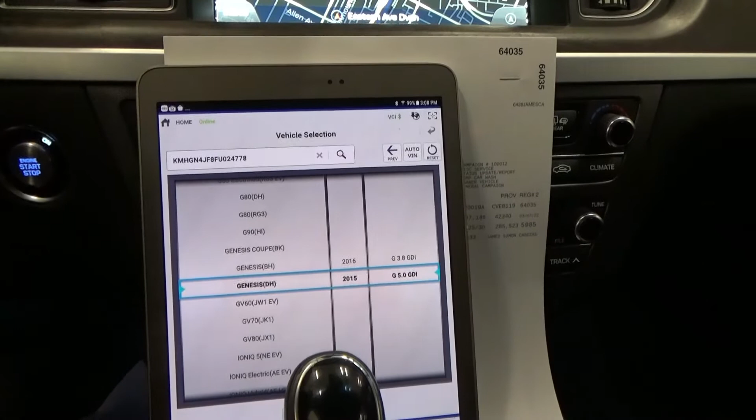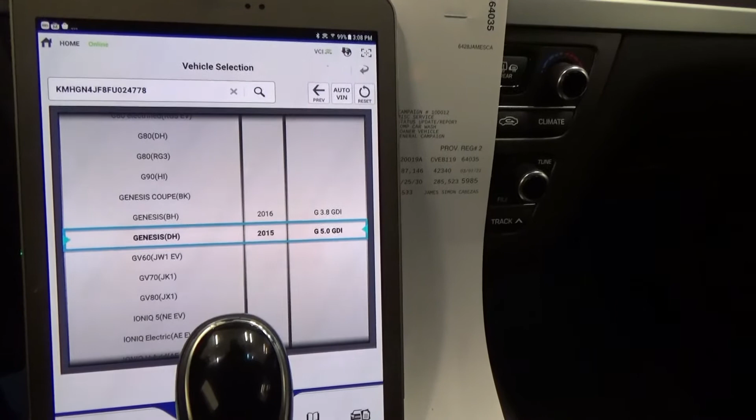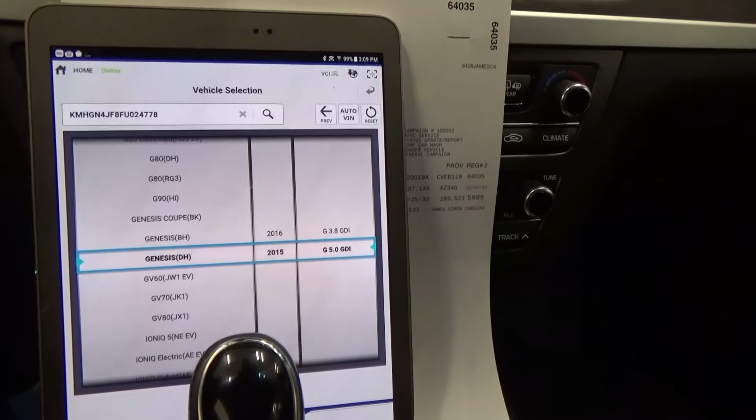So today we got a Genesis, I think it's a 2015 5.0 liter. Customer complained that every time he opens the door, it's not all the time, the trunk opens by itself. I duplicated the problem. I open, it doesn't matter which door, even the driver front, passenger front, rear doors, all of a sudden the trunk will open by itself.

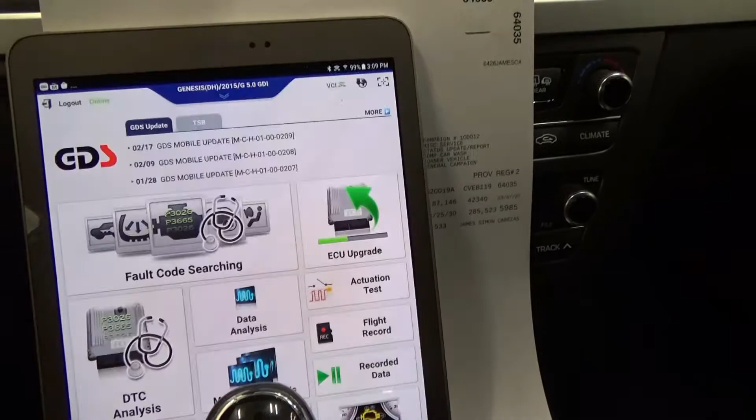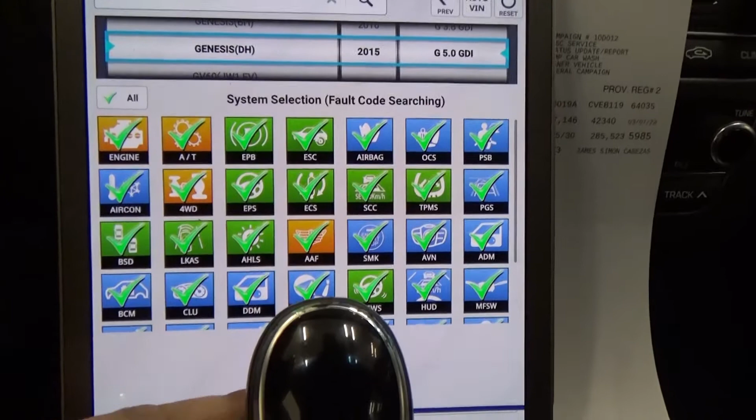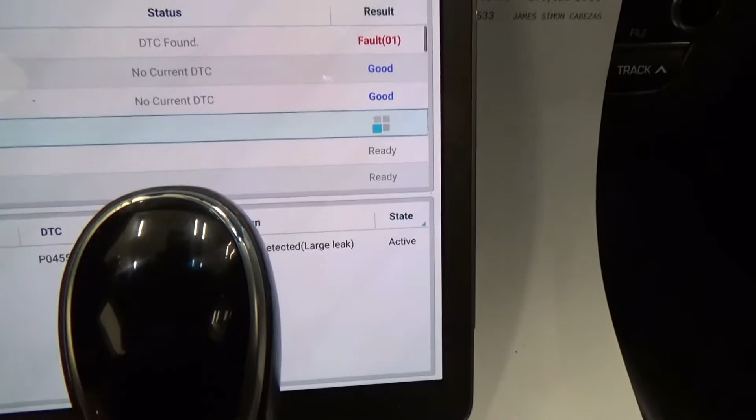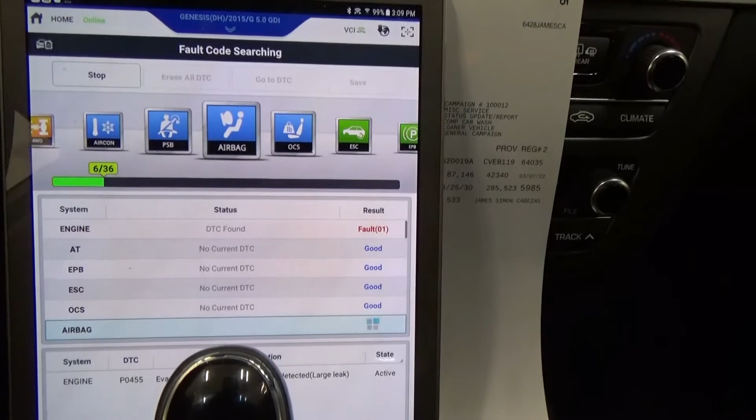Let's just scan for codes and see, because this one has a smart trunk, or a power trunk module. Let's see if we have some codes there. And I know that there's some updates for the G70s, I think G90s too, for the trunk module logic, so it could be that, we don't know. Got here an EVAP code for the engine control module. I just did a repair on this for a vapor line, so I'm gonna skip through that. Just concerned about maybe our electronic part on this vehicle.

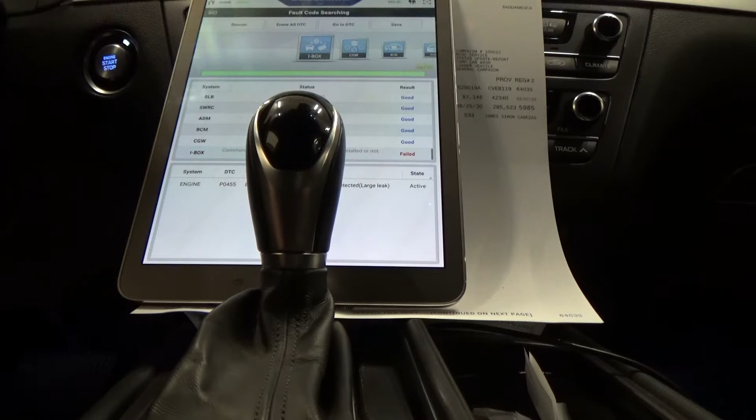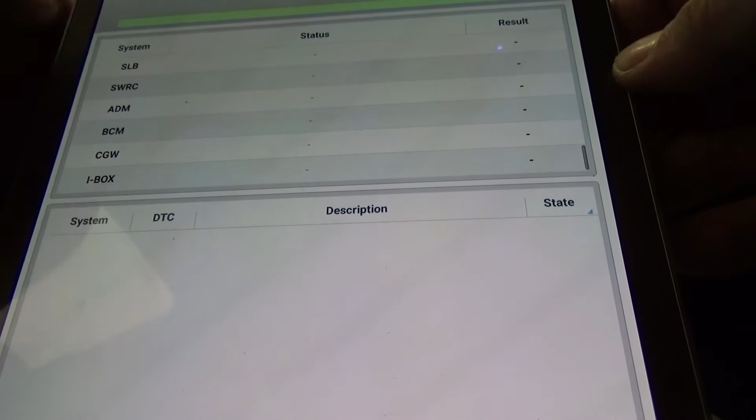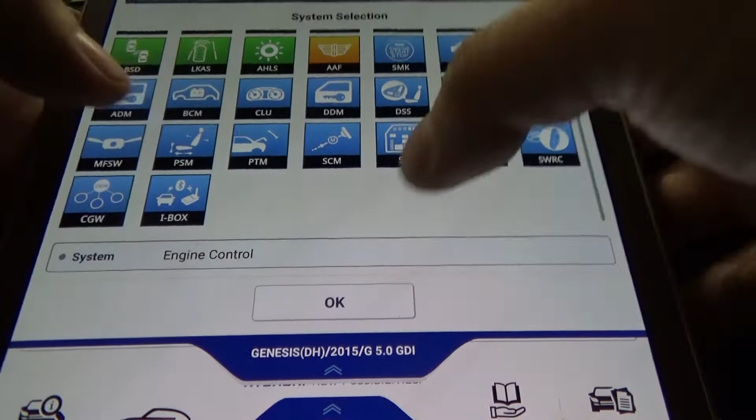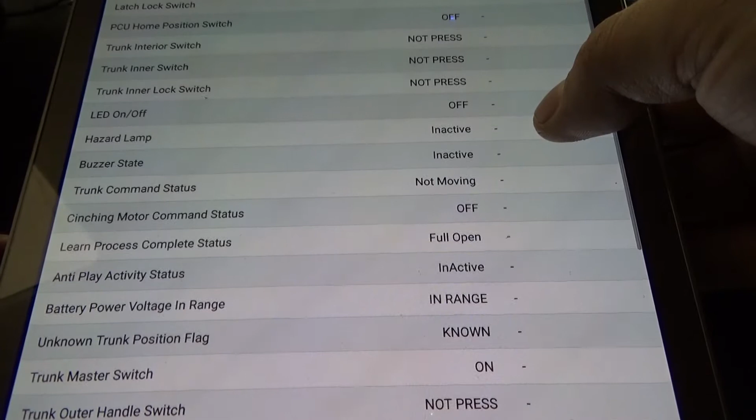Okay, so I have codes for our trunk module and it's communicating well, so I'm just gonna clear this and we're just gonna go through our quick data on our power trunk module and see if we can find something in there. Okay, we got battery voltage, trunk position 0, and trunk interior switch, trunk inner switch, trunk inner lock switch.

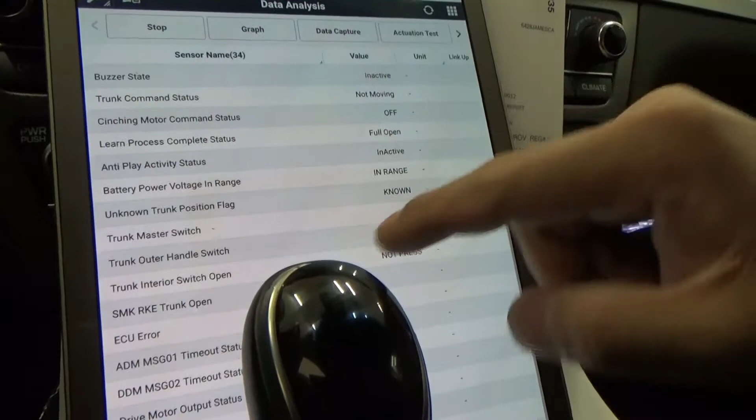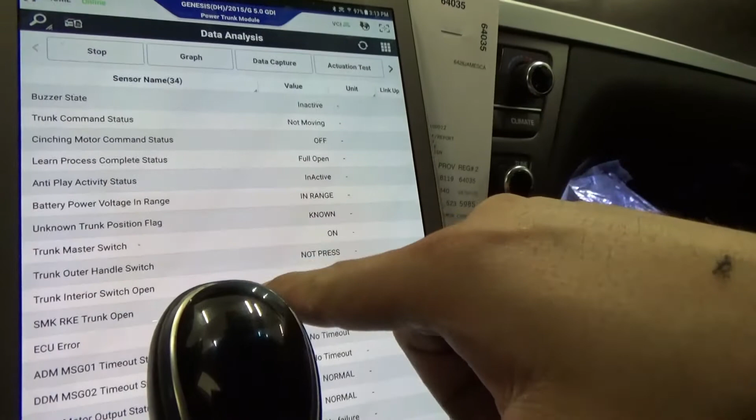I know there's like a safety switch here inside the glove box. I'm just gonna press that and see if we have some data changes. I'm just gonna look at that trunk master switch. It's off. It's on. Okay, we have some trunk, smart trunk. Okay, let me click all those. Trunk, trunk, trunk.

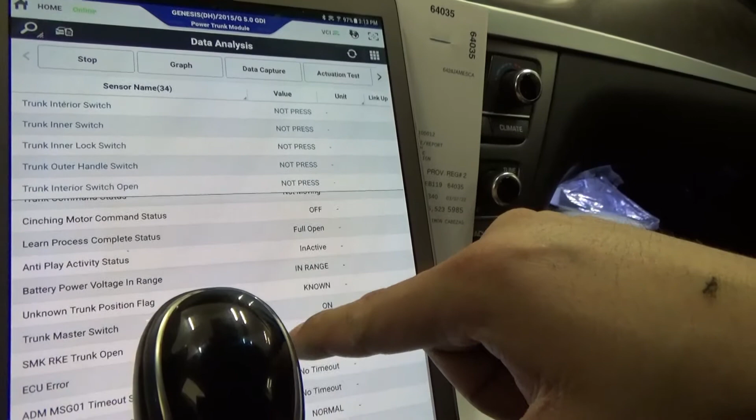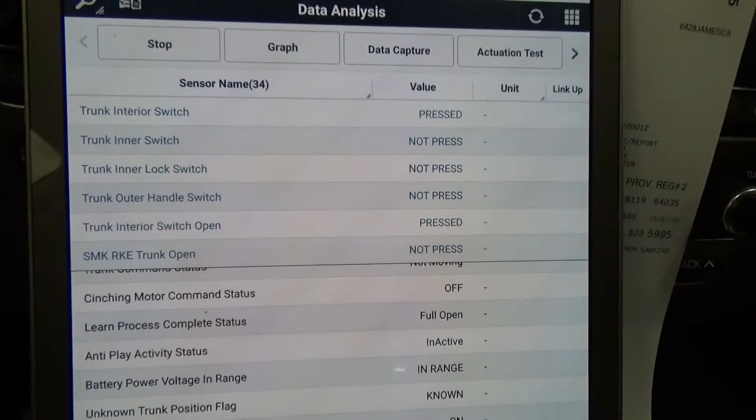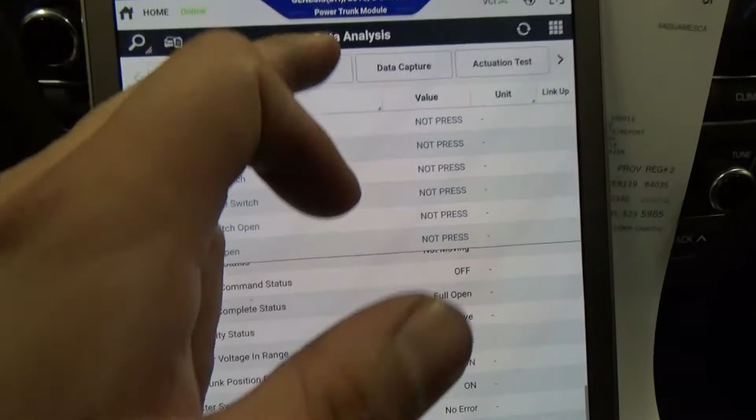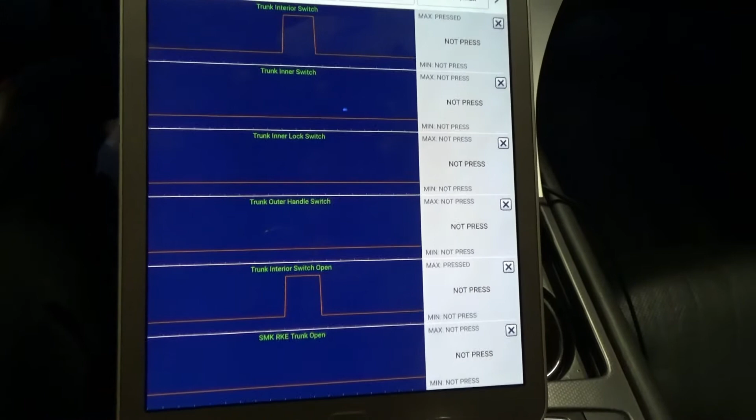Okay, so first we're gonna try to activate this trunk on the left side of your steering wheel. Just gonna press that. Okay, trunk interior switch. Okay, it starts opening now. Can I close that here? Okay. Trunk interior switch. Let's press again. Let me graph that so it's easier to see. Close it again. Oh, I think I have to hold it when closing.

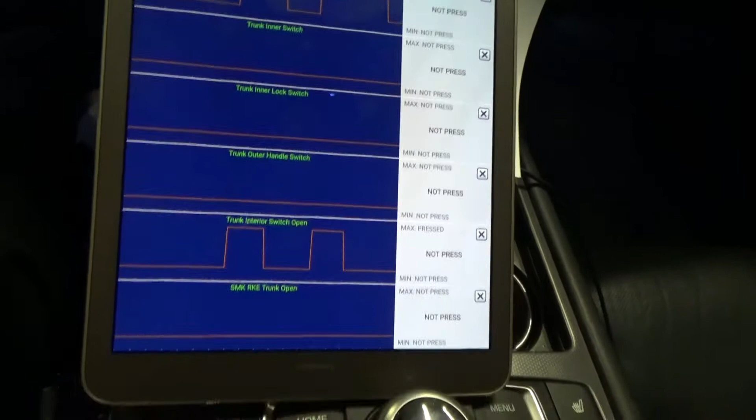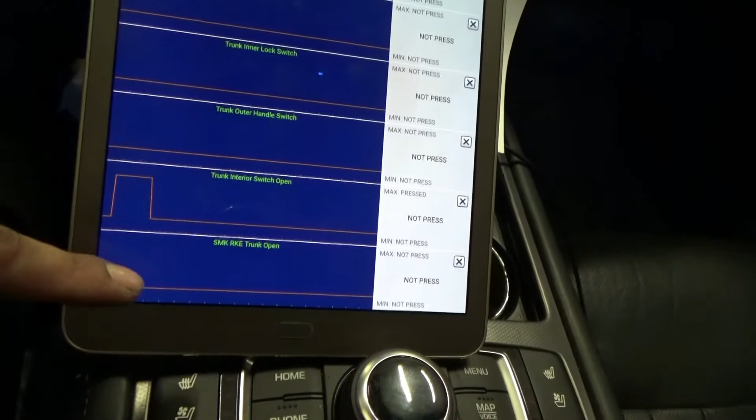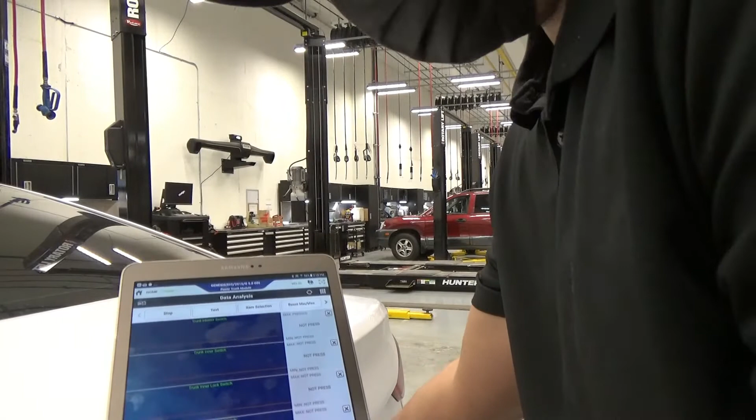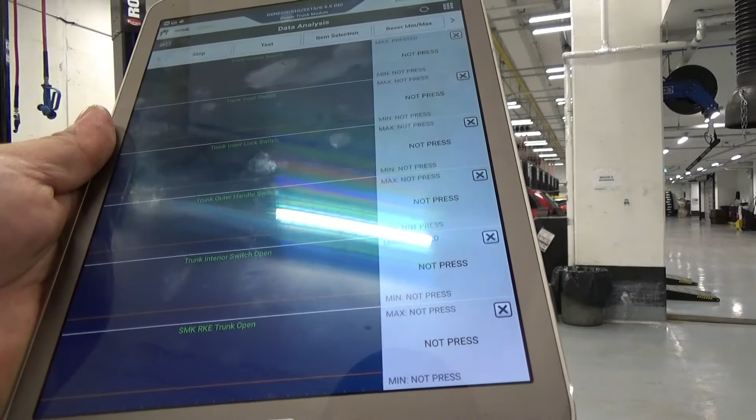Okay, so now what we're gonna do next is this guy here, outer handle. And we're gonna try to use also our smart key to open. Let's just check what's working on this vehicle. So I'm just gonna press the outer side door handle. Okay, that doesn't work. It's not working. So we know our outside door handle is not working. And I'm just gonna use our smart key. Okay, I see that change on the graph. I pressed it. Alright.

So I'm just gonna close it back, and then let's try to duplicate it while I'm going to try to open the door.

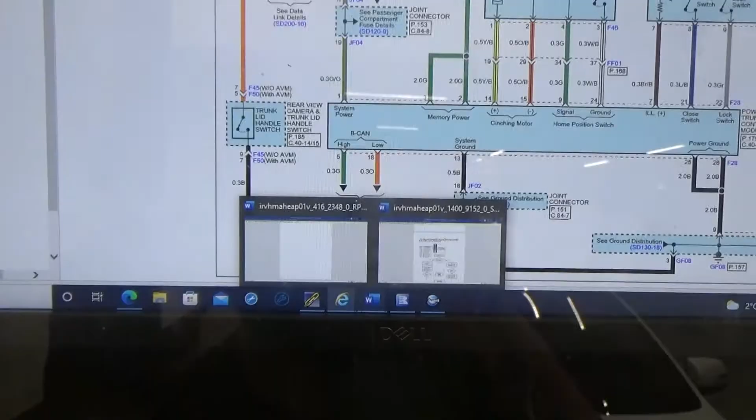So I'm just going to show you the schematic on that, so that we know what we're doing at the back. As you can follow my mouse here, this switch, we're gonna check it. There should be a signal coming out from this orange wire if our switch is normally open, and once we press that, it sees the ground and it opens the trunk.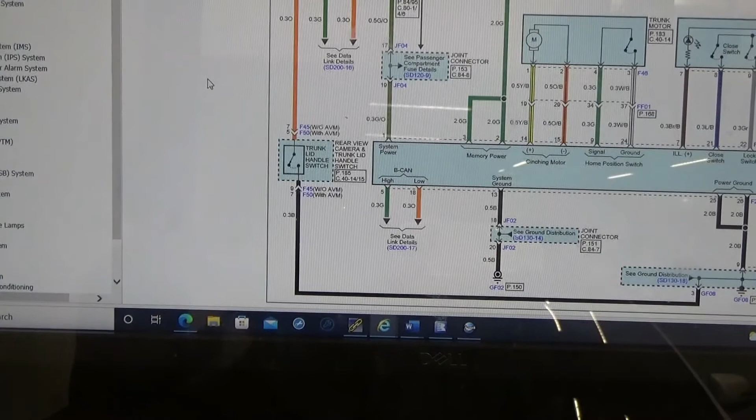So I'm just gonna remove that trunk trim, and we'll find this switch and we can do some testing. So let's see, where's this component. That's gonna be F50, so around this guy here, if you can see my mouse, that guy.

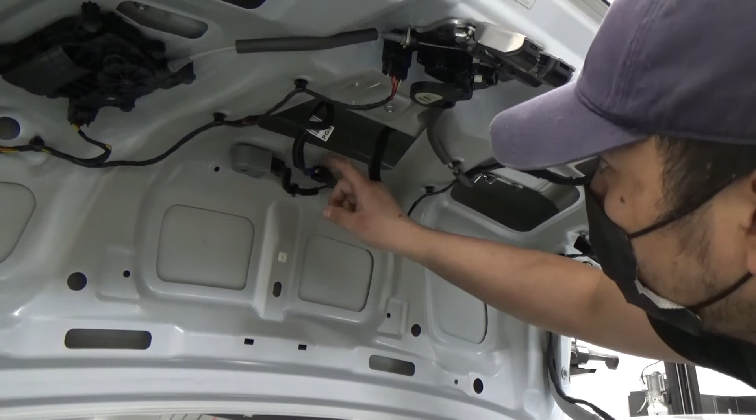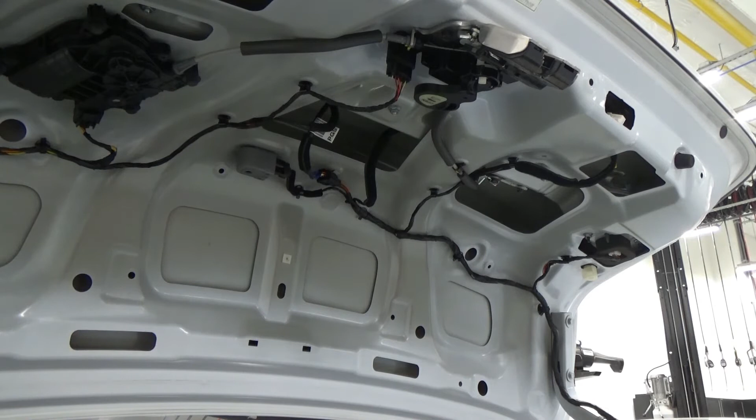We're going to be checking this connector here for our signal. I know they have some issues in here on the harness on the side of the trunk arm, but we still don't know if maybe there's a short to ground there or something like that. But we'll just double check here. I'm just gonna hook up our scan tool and monitor that data feed for the trunk switch.

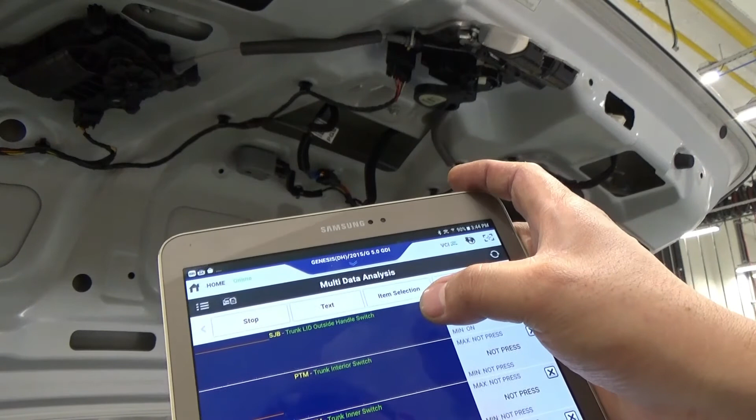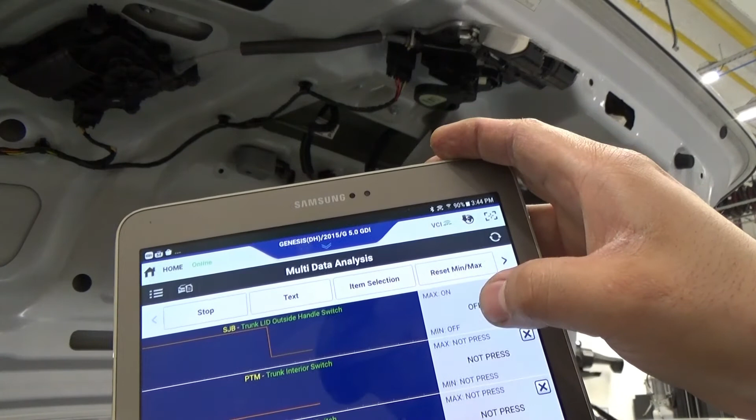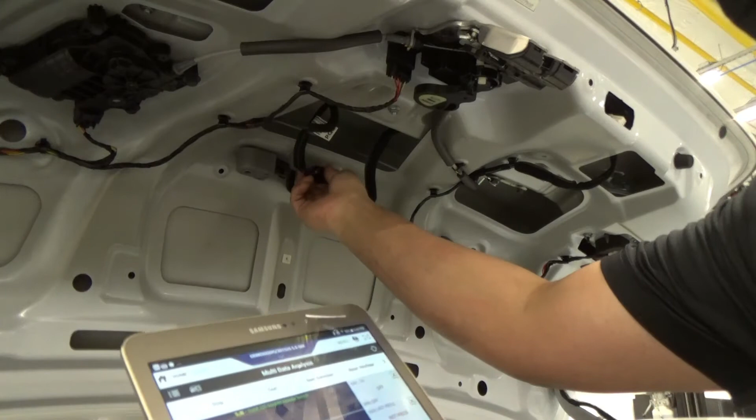Got my data feed for our outside trunk lid, as you can see, this guy here. I'm just gonna try to unplug this to see if it changes the status. Yeah, so you see that it changes the status of our trunk lid outside handle switch. So I'm thinking we got a short to ground, or it's either the switch itself is not working. So I plug it in and it's staying on, right?

So what I'm gonna do is let's check some voltages. I think it says there orange wire and black wire. Orange and black wire. So I'm just gonna back probe that.

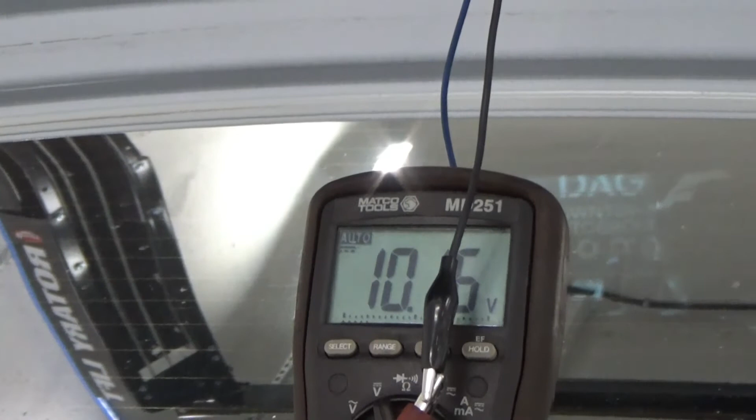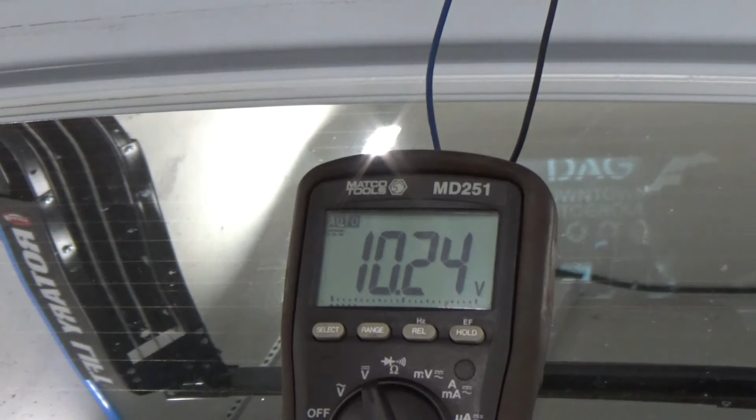So as you can see there, with the connector unplugged, I got 10 volts. That's the signal from the IPS control module, or the smart junction box, I think, or the power trunk module. And then when I plug this in, it completed the circuit. So you can see that.

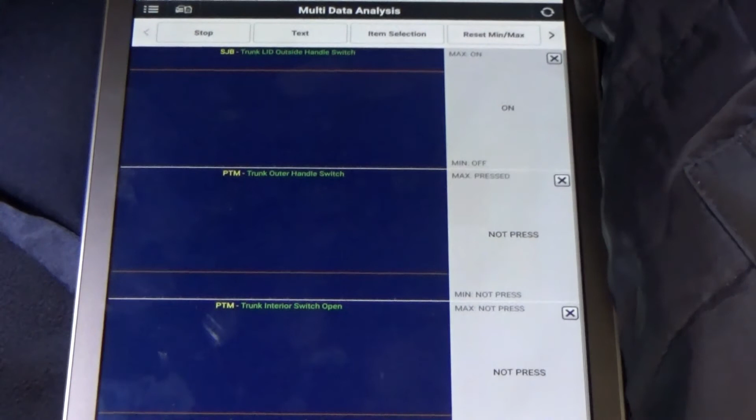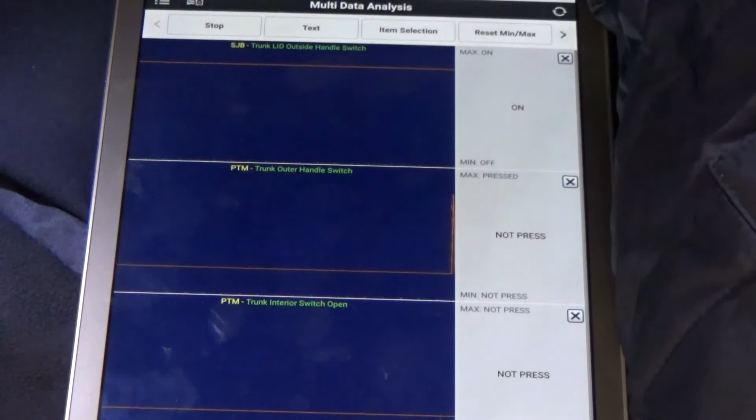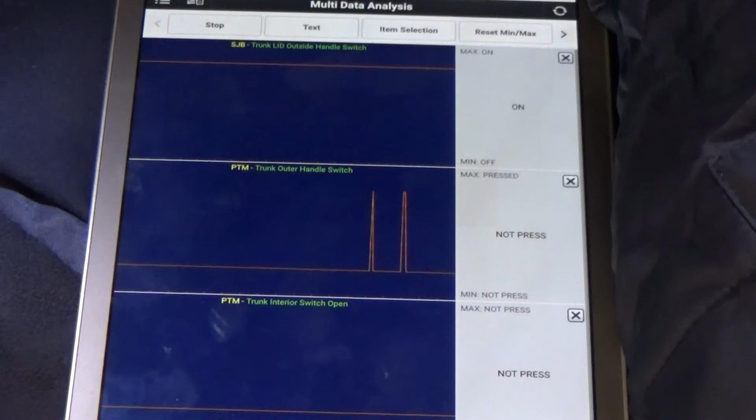Hi guys, so while we're doing testing, as you can see it's still saying not pressed while I'm moving this guy here, and it's trying to say something there, right? I think it's because of that harness from the switch, because if I remove that connector and do a wiggle test on the harness itself going to the module, it doesn't do anything. But if I do this, see that it's staying on.

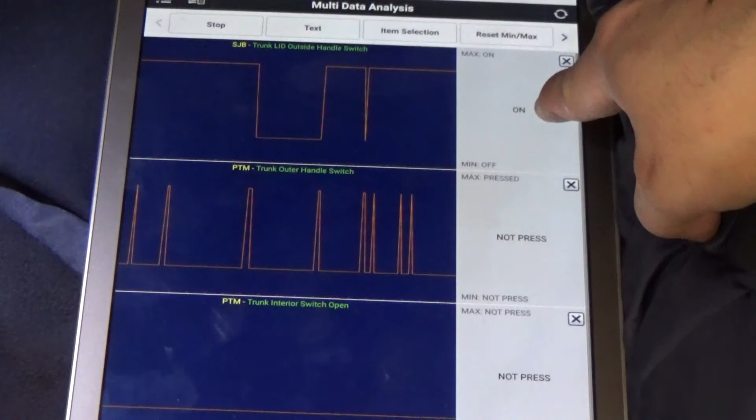I'm just gonna try to wiggle it and put it in off position, because I think that's why it's not showing, or the switch is not working, because it's staying in on position, meaning that someone is still pressing it, or the module is seeing a ground. But I'm confident enough that there's no short to ground on the signal wire.

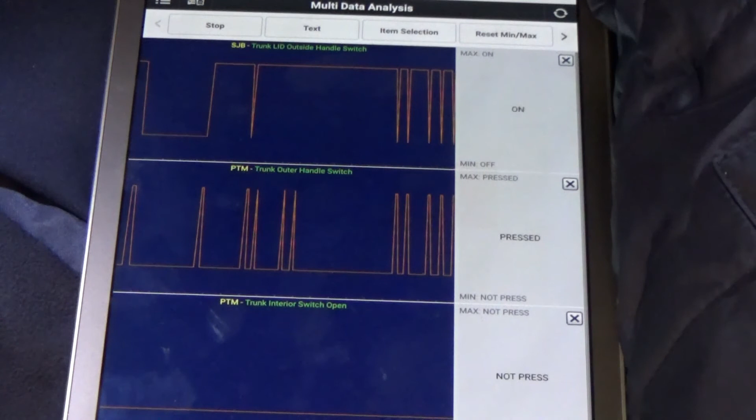So as you can see it's turning on and off, I'm just wiggling that connector. So it's either there's something wrong on that pin. I don't see any corrosion in there, or bent pin or something like that. So this guy needs a switch. I think it's just a pretty simple replacement on this guy here. I hope so.

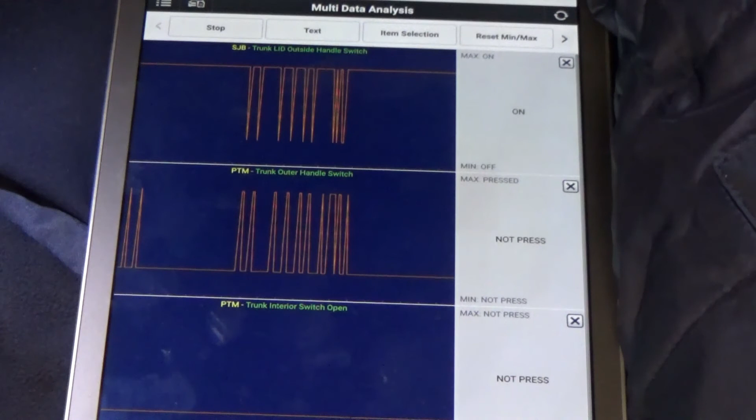Or you have to remove the outside trim piece on this guy. So I'm just gonna do a follow-up video, or continue this recording replacing the switch, and that's it.